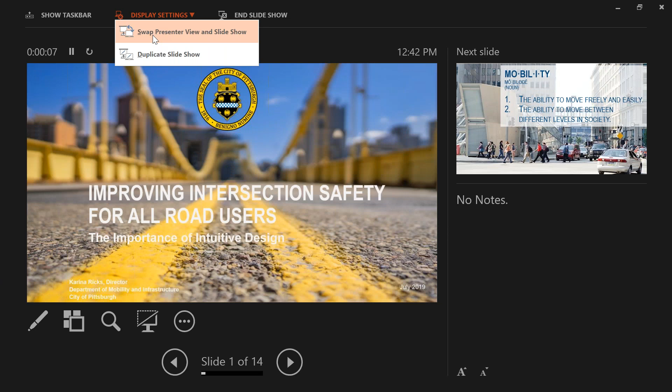Great. Well, thank you, Ben, Jeff, for allowing us to be a part of this presentation. What I'm going to talk just briefly about, I'll speak at a much higher level, I think, than the other presenters on this, but talking about the importance of intuitive design and what that means, how you sort of see things through that lens, and how we make planning and design decisions based on that ethos.

So maybe just a little bit before we get there, talking about the general philosophy and mission of the department that I'm fortunate enough to lead. The Department of Mobility and Infrastructure is a relatively new department in the city of Pittsburgh. It was, as many departments of transportation are, born, extracted out of a combination of the Department of Public Works and the Department of City Planning to bring this together.

But it is very inspiring to me that our name is the Department of Mobility and Infrastructure, because mobility has these two definitions associated with it. It, of course, has the definition of the ability to move freely and easily from place to place. But mobility also talks about social mobility and economic mobility.

And we know from research at Harvard University that the two are inextricably linked. That the travel time to destinations, and importantly, the travel time to employment opportunities, is the single most important factor in determining a household's ability to leave poverty and better themselves and future generations. So

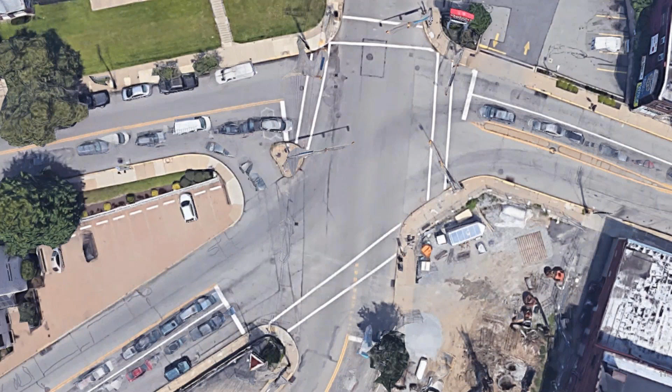Is it intuitive, the direction of travel they're supposed to take? This is an intersection we're working on, and we do have some improvements coming, but this is something where we really need to stand there together as a team, understanding all the rules, protocols, and design guidelines that exist, and recognizing just the human element of being out there on the street.

So again, this is really something qualitative, but it's a lens we use as we think about this. We're learning every day what it means and what limits we can really exercise if we're to achieve this goal. And again, this is a sub-goal under the overall imperative that we have, which is that no one dies or is seriously injured on our streets.

We need to understand that there are different cultural norms even within our own city, and what might be intuitive, comfortable, or safe in one neighborhood or for one age group may not be the right answer for another. So thinking about the diversity of our communities, we need to consider what practices we can teach our community, in addition to the design changes we can make at our intersections. And then really starting to understand preferences and putting those into the plan so we can pursue additional actions there.

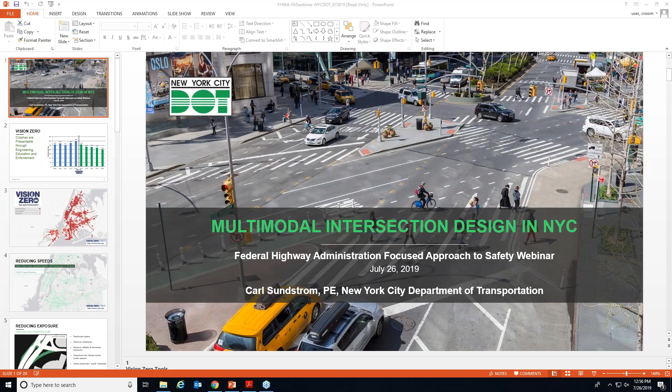Let me close this poll because I'm interested to show you all these results. It looks like the winner here, 53% of you mentioned the limited funding for making these improvements, and certainly I think that's often cited. If you're forced to pick one of these, that's a pretty common choice. Second place was 15% of you have no adopted plan to really formalize that prioritization and process, then 12% lack of familiarity with countermeasures, 11% lack of staff capacity. Many of you in the chat pod and in the other category said all of the above, so I didn't include that option, but that certainly is the case, and a lot of other ideas are coming in as well. Hopefully this can segue into our discussion later, but I thought that'd be interesting to ask you all that question and for our panelists to see.

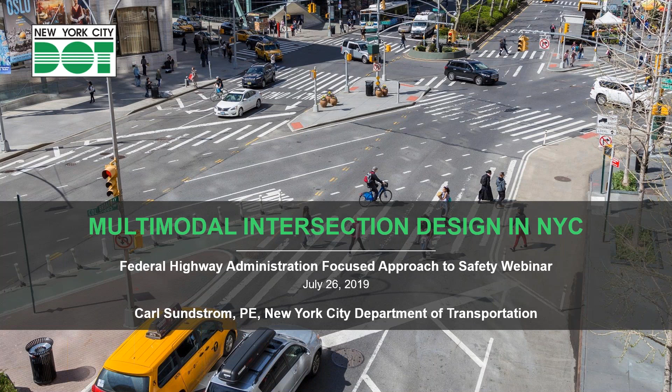So just to touch on our Vision Zero program, which guides a lot of our transportation planning and safety efforts in New York. It's a multi-agency policy that focuses on preventing crashes through comprehensive legislation, planning, enforcement, engineering, and education efforts. The idea is to really change public policy and mindsets through this Vision Zero program. It has brought us success in terms of reducing traffic fatalities, particularly pedestrian fatalities - we've seen a lot of success. They've been steadily falling, as you can see on the screen here, even though we've seen a pretty large growth in population, jobs, and tourists since 2014.

But of course, Vision Zero is about saving every single life. So we're going to continue to do what we know is working, but we're also going to keep expanding into new programs and policies and try to keep working at getting that number all the way down to zero.

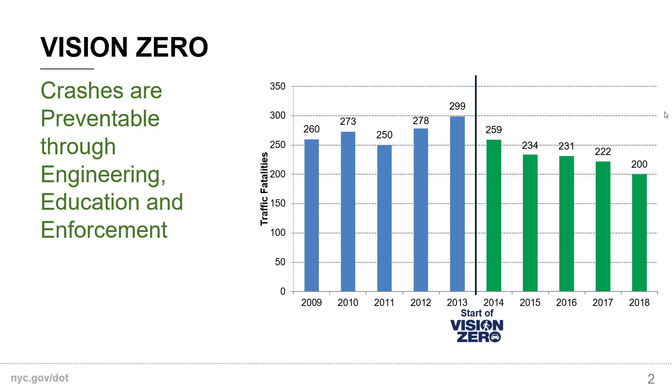This map here shows the Vision Zero priority geographies that guide many of our Vision Zero safety improvements. On the screen here, you can see the priority intersections, corridors, and areas, and all of those have been identified. Each of the 5 boroughs was ranked independently based on pedestrian killed and severely injured, or KSI, crashes. Those have all been ranked, and we picked the highest KSI locations for intersections, corridors, and areas, and that really helps us prioritize a lot of our improvements that we roll out citywide.

And then, though it's not shown, we also have some Vision Zero bike priority areas, which were based both on cyclist KSI crashes, but also bringing in a layer that focuses on dedicated bike facilities and identifying the locations with high ridership and high crashes that also have a lack of bike facilities, to really start focusing some of our efforts in those bike priority areas.

There's a link to this website here, vzv.nyc, the Vision Zero viewer, so you can go onto this website if you're curious to see more about our priority geographies. It also maps our crashes and maps a lot of where our treatments have been installed. I have several other links throughout this presentation, but if you download the slide deck that Dan put up there, you should be able to access a lot of the reports and stuff that I referenced.

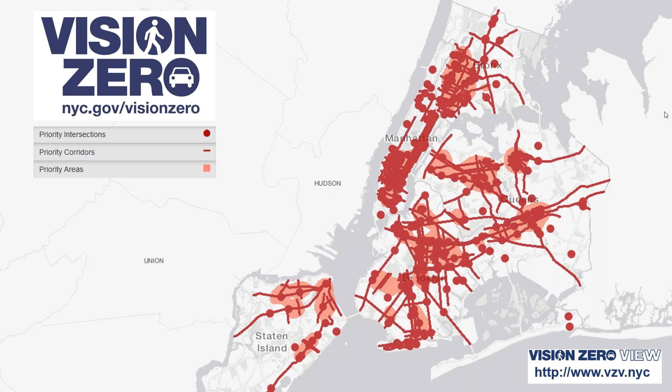One of our first Vision Zero efforts was to reduce the citywide speed limit from 30 miles an hour to 25 miles an hour. That occurred in late 2014. Since then, we've been working really hard to retime all of our major streets down to a 25 mile an hour progression. It takes time and a lot of work, but we think it has a pretty big effect in reducing speeding, especially the highest speeds. We've made a lot of progress on a lot of those streets, and we'll continue to get to the rest.

At the same time, we also have a pretty robust automated enforcement program where we have 150 red light running cameras that are active, and we're expanding our speed enforcement camera program to reach 750 school zones.

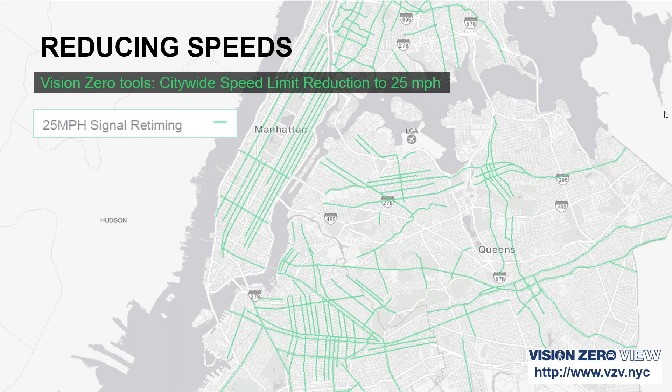Before I dig into the specific programs, I want to give an overview of the approach we take for many of our bicycle and pedestrian projects, especially at intersections. We start with a traditional approach where we look at the traffic analysis and do some field observations, seeing what's happening out there, what the capacity is on the street, and things that could be fixed, like what's happening in the curbside lane, for example if there's a lot of double parking or other issues we might be able to address.

We also take stock of the bike facilities and bus lanes and bus routes that may be out there. Then we really try to roll up our sleeves and simplify the intersections, remove some movements, make some signal timing adjustments. Sometimes that includes banning certain turns, really focusing on accommodating those desire lines, especially for pedestrians. That may mean adding median islands, closing slip lanes, or adding diagonal crosswalks. It's specific to each intersection. We also focus on making road users more visible by increasing pedestrian space, shortening crossings, and making sure we're designing safe facilities for everyone.

We also, as best we can, try to bring in community partners and other folks that can turn a lot of these reclaimed spaces into more social spaces for people.

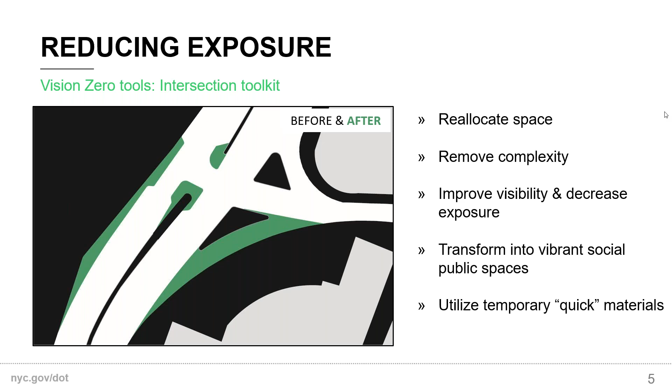A lot of this is done with our low-cost toolkit of things like epoxy gravel, using a lot of delineators, and concrete, using granite blocks and jersey barriers, and then in addition to that, doing some signal work. So a lot of this is pretty low cost. It avoids a lot of the challenges you run into around intersections, especially with drainage issues. It's a nice way to get something out there on the ground, and then you can look in the future at doing the more capital build out.

One of our major tools for reducing conflicts between pedestrians and turning drivers are the leading pedestrian intervals that we're rapidly installing citywide. So far we've installed over 3,700 LPIs, including over 700 just this year. The way LPIs work is they allow pedestrians to get at least a 7-second head start. It could be lower in some cities, but we start at 7 seconds and go up from there. That gives pedestrians a head start to move into the crosswalk before vehicles begin to move, and lets them establish the right of way. Oftentimes it gets them totally across the travel lane where drivers may be turning, and it's effective at reducing pedestrian vehicle conflicts.

In terms of our installation criteria, you can see we've installed a lot. We have two standard criteria. One is the expedited, where if you're in one of those Vision Zero priority areas, or if there's been a fatality, or if it's in a school zone, or a zone with a lot of senior pedestrians, or a location where a bus makes a turn, that will get an LPI right away. Then we also do a more standard analysis where if there have been 3 or more failure to yield crashes, or a high number of turning vehicles, we'll also put an LPI in. Anytime we retime our corridors, like retiming these corridors to 25 miles an hour, we look at the geography and go ahead and put LPIs in along the entire corridor.

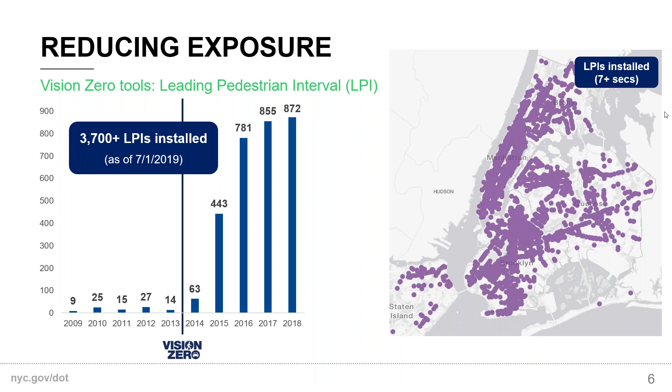One challenge that we've had is when you're holding through traffic back for 7 seconds, that really does impact traffic capacity, which can, depending on how saturated your street conditions are, have a really big impact and lead to gridlock, blocking the box further upstream from these intersections, that sort of thing.

So we really had to think a lot about this, and how do we balance the multimodal needs and ensure that we have safe crossings for pedestrians by providing these LPIs, but also not taking too big of a hit on our traffic congestion.

And so what we came up with was what we've been calling a split LPI, or a delayed turn, where essentially what we do is add a turn lane. So in this example here, it's an intersection, which is pretty typical for us, of two one-way streets.

We add a turn lane for, in this case, the left turning vehicles. They are held with a red arrow during the LPI phase, where the through traffic gets to go and the pedestrians get to go. Then after 7 seconds or so, we'll put up a flashing yellow arrow and allow the drivers to turn once the intersection is clear of pedestrians and they can safely turn. So this is a nice way to provide that LPI on some of these more congested corridors without really impacting that through volume.

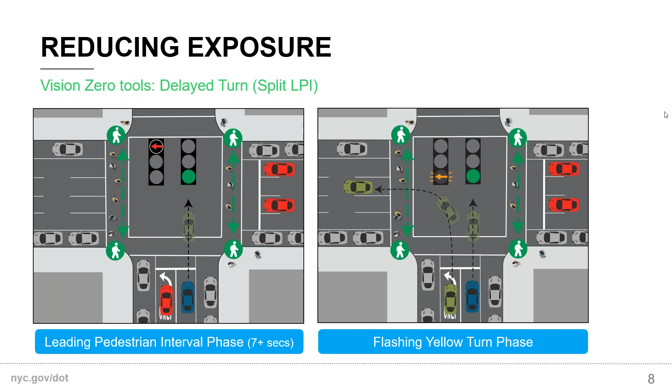And speaking of bikes, we're also just looking at how we can bring the benefits of this safe head start to bicycles as well. One of our council members proposed a change that allows bikes to use the LPI.

After some back and forth among our different agencies, we were asked to conduct a pilot test of allowing bikes to use the LPI first, just to see if there were any concerns.

One of the bigger concerns was whether this would impact pedestrian safety in terms of cyclists maybe not yielding to pedestrians who are crossing during the LPI. So what we did is an observational study where we looked at the behaviors of cyclists out there today at locations where there are LPIs.

We found that already today, almost virtually every cyclist is using the LPI. They're not waiting for the green ball to go. So this is kind of already existing behavior, and we didn't observe at any of the intersections any conflicts at all between pedestrians and cyclists. We also did a crash comparison.

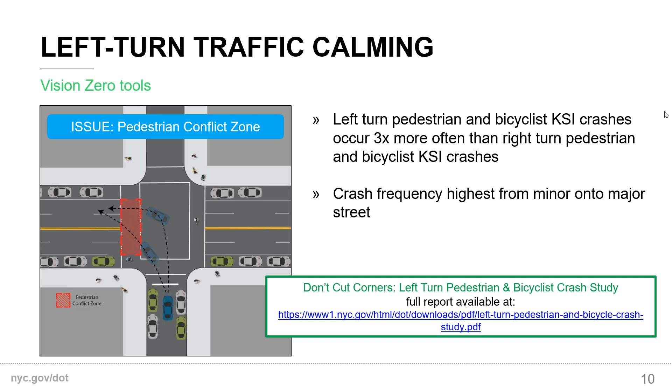Part of what we think is occurring with the left turns is that there's a large conflict zone, as you can see in the diagram here, where drivers are cutting that corner and coming at a faster approach speed, also leaving pedestrians more exposed for a longer crossing. I think that's a big part of it. And then the vehicle design itself, where the A pillar might be obscuring pedestrians, is another issue with left turns. If you want to read more, there's a link on the slide you can look into later to read the full report.

So what we did is we designed a left turn traffic calming toolkit. This shows an initial treatment, just the hardened center line, where we put vertical delineators on the center line itself to guide the driver around the corner and not allow them to cut the corner and cross that center line. You can see that cuts that pedestrian exposure distance in half right there.

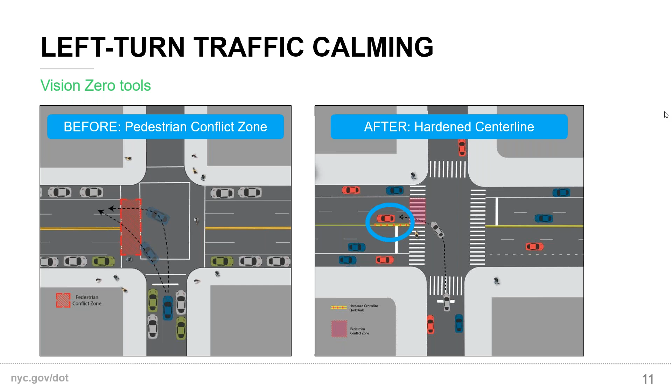This is something we tried out. It looks pretty good, so we started rolling out and evolving the program. Here's a photo of an additional treatment, a photo of the hardened center line. And on the lower left, you see a slow turn wedge.

This program can be done using a combination of these treatments, or they can be used individually. For example, we would use that slow turn wedge, but not a hardened center line, if you were turning onto a one-way street where we couldn't use a hardened center line. And the slow turn wedge itself, we've been experimenting with different materials, like using rubber speed bumps in there, or even raising it up with asphalt.

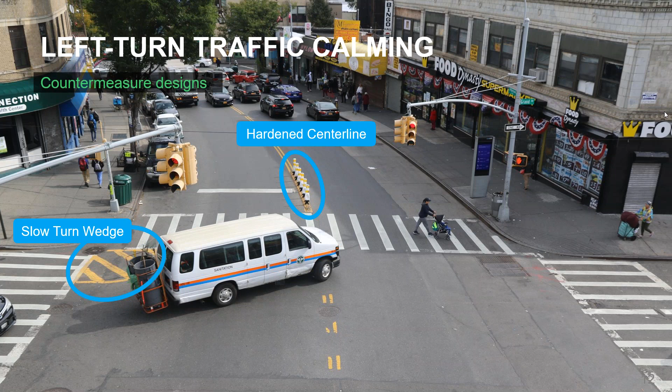So we've been evaluating this treatment, and we found that the median left turn speeds have decreased by over 20%. The maximum speeds have decreased by almost 20%. Vehicles crossing the double yellow line has basically been eliminated, which makes sense.

But there have been some durability issues. In the photo on the right, you can see a rubber speed bump, and behind that are those delineators. Initially, we did not have that speed bump, and what we found is that a lot of drivers were hitting those delineators. So we went out and purchased these speed bumps and put them in, and it protects the front of those delineators. That's really saved us a lot in terms of drivers knocking over the posts, and it's also decreased the speeds even more.

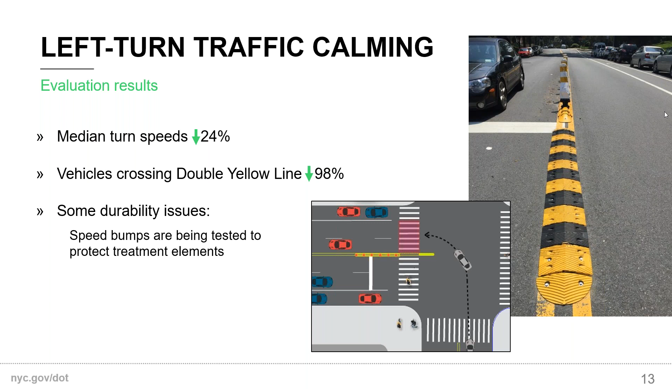The one thing to mention is that we're still keeping an eye on how these weather and how they go through the winter in terms of snowplows hitting them, and how frequently they need to be replaced, and also paying attention to where we place them in terms of where a bike facility may be, making sure they're out of the way and not an unexpected bump in the middle of the road for cyclists.

In terms of how we're implementing the left turn traffic calming program, we're trying to do at least 100 locations each year. We're really focusing on areas that had 5 left turn pedestrian and bike injuries or more, which there are 525 intersections in New York that have that on average. So there's a lot of work to be done, but we're rolling these out pretty quickly. Again, there's a link there for the left turn traffic calming program website if you want to read more about it.

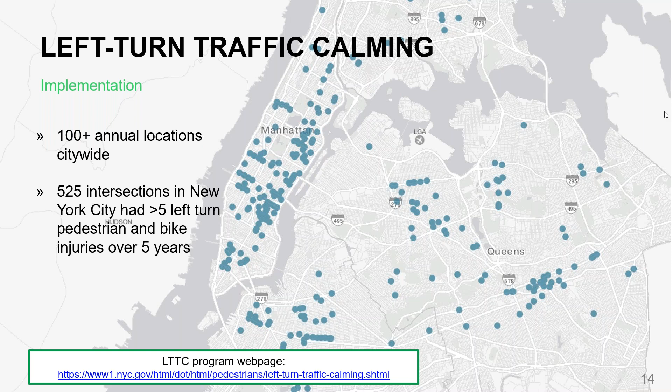And then finally, I want to talk about intersection design for protected bike lanes, because that's been a pretty hot topic for us recently for a number of reasons.

One is that we just have a lot of miles of protected bike lanes now, and they've been in long enough that we now have enough data to really conduct an evaluation on these different intersection treatments.

So we've been installing protected bike lanes in New York since 2007, and they've really increased the comfort of cycling and attracted a lot of new riders. And they've also increased the safety for cycling along many of these key corridors that we've installed the protected bike lanes on.

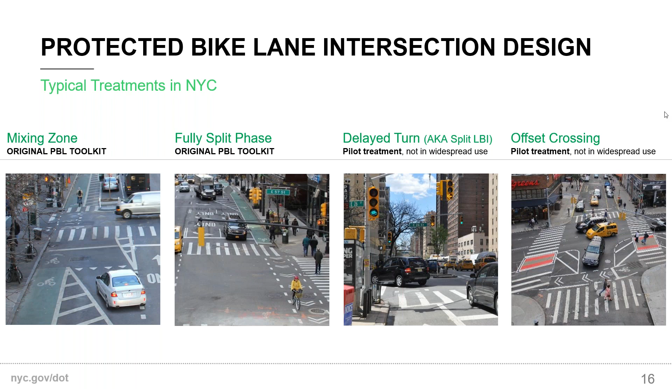And what we did in the study is we looked at it in a few different ways. So safety was the first thing we looked at, but we could only look at crashes for the mixing zone and the fully split phase intersections, because those are the two where we have some crash history.

But we also hung cameras at many of the intersections and looked at conflicts that were occurring and just how people were actually using these designs.

So this kind of gets back to Karina's point about like what's intuitive and how people want to use it or how people expect to use it.

And then we also had our street ambassadors go out and do cyclist intercept surveys, just after they had gone through a lot of these different intersection types, just to get a better understanding for how people perceived the safety of these intersection treatments and if they really understood how they're supposed to operate.

And what we found is that the fully split phase intersections had the lowest crash rate, compared to the mixing zone. They were safer at the wider crossings, but not necessarily at the narrower crossings. So where we had just a shorter crossing, the mixing zone was just as safe as the fully split phase.

And what we think is happening there is that when you introduce a fully split phase, you're introducing a lot more delay for cyclists because you're taking away their green time.

So in the mixing zone, you have the full green time that the cars have in the through movement. But when you split it out between bikes and the turning movement, you're increasing that delay.

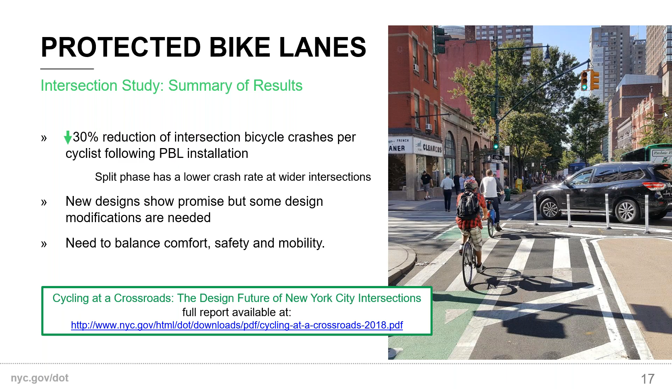And the last thing I'll mention is that really nobody understood who was supposed to yield at any of these intersection treatments. So that's another issue that we need to solve in terms of what makes things intuitive and what the expectations are for the different road users. And all this is summarized in the report, and there's a table in terms of the application considerations where we want to use these different ones based on our safety and comfort findings.

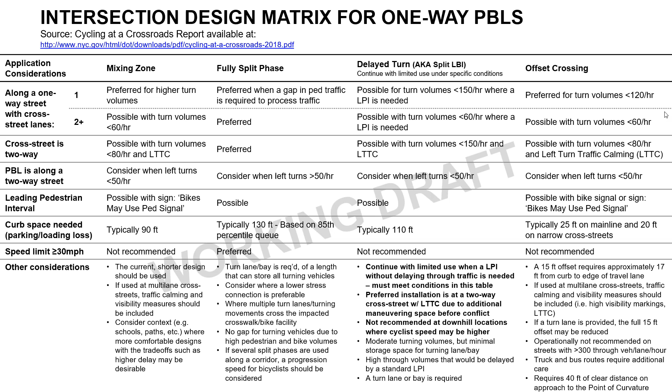So this is a lot to dig into, and I'm running out of time, but there's a link there again that you can go into at your leisure.

And then I just want to point out a few of the things with the offset crossing. I mentioned that this is kind of our take on the protected intersection, but the design challenge here is that we have a really constrained geometry to work with. We're not cutting into our curbs at all, into our sidewalk space, and our cross streets in a lot of these cases are 30 feet wide. They're pretty narrow.

So this is kind of the evolved design that moves past what we did with our pilot study, where we were concerned about the turning speeds being a little bit high. So we've designed this truck apron using a speed bump, which you see there in the black and white speed bump there. The other nice thing about the offset crossing is that it provides an additional pedestrian island on the upstream side of the crossing, which doesn't exist in a mixing zone. You can see that the conflict point is reduced to a single area, right where that lead cyclist is riding through.

And we now have these where we have intersecting protected bike lane facilities. So there's space there to run a curbside protected bike lane on an intersecting street through kind of that turn wedge and provide kind of a protected intersection type of geometry. So we're still studying these. We're still modifying the design. We're still trying to figure out how they work operationally in terms of traffic flow as well.

But we're pretty excited about them, and we've been retrofitting a lot of our mixing zones after resurfacing to include this treatment instead, and then a lot of our new projects are getting them. So with that, I think I'm out of time, but excited to talk more during the Q&A or in the future.

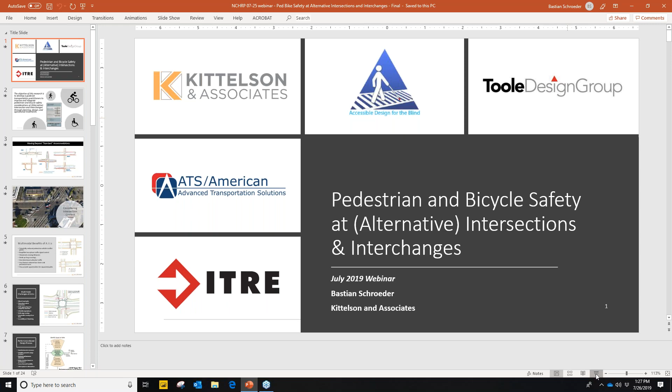Okay, thank you. So in the last presentation today, I want to talk about an assessment method that came out of an NCHRP project, 7-25, that actually is about to wrap up, pedestrian bicycle safety at alternative intersections and interchanges. But you'll see we put alternative into parentheses now because really what we came to find is that the assessment method we came up with really works for many intersections, and seeing the prior presentations by Karina and Carl really resonated, that really some of the concepts that we're finding to be challenging from a safety as well as comfort perspective for pedestrians and bicycles at alternative designs really also show up in more conventional intersections.

But our initial objective is to develop a guidebook for practitioners to improve and integrate pedestrian and bicycle safety into what we now call AIIs, alternative intersections and interchanges. And we expect this guidebook to be published in early 2020. At this point, we have presented an initial draft of our guidebook to our project panel. We're getting ready to submit a revised guidebook very shortly, and then we're hoping to see that through to publication early next year.

The key to all this is to move beyond what have now become kind of the standard accommodations, and that's the word that has almost become a little bit of an undesirable word when it comes to pedestrian and bicycle safety, so that the intersections are designed primarily for vehicular traffic, and then we check the box. Let's get pedestrians and bicycles through there. Let's accommodate them somehow into the design. And really our focus is to move from accommodation to integration.

So as we're laying out the new design, really integrating the best and most viable and most appropriate design early on, which includes decisions of facility selection. And that might be one of those protected bike lanes that Carl mentioned. Really, we need to know that before alternative selection or during alternative selection, so that the adequate right-of-way decisions can be made.

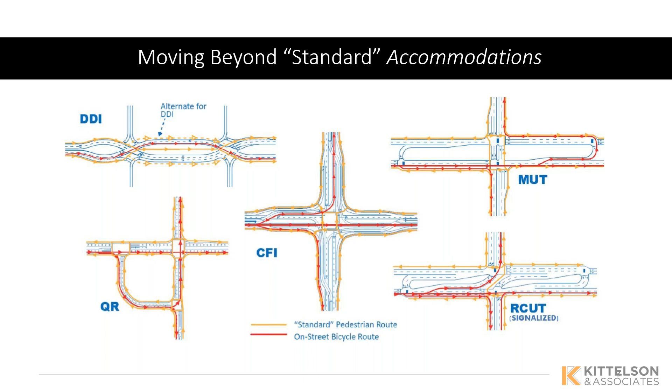Here's the 5 most common alternative designs that hopefully many of you are familiar with. And what is shown here is what has typically been the way that pedestrians and bicycles move through these intersections and interchanges. But we're really taking a fresh look at that and seeing, are there maybe other options?

An important thing to remember is really intersection context. And what I mean by that is to consider where these alternative designs are typically being used. And we saw a lot of examples that Carl showed, for example, of really narrow one-way streets in New York City, where some of the pedestrian bicycle safety treatments are maybe a little more viable when it comes to slower speed facilities and lower vehicular volumes maybe.

But we see a lot of the alternative designs really replacing intersections like this. So very, very wide cross sections. There's a skewed approach. We have dual left turns in the east-west direction, and then we have protected permissive left turns in the north-south direction. And we can probably have a separate conversation of which of those is actually worse for pedestrians and bicycles.

So a lot of times these alternative designs are being put in for either a vehicular capacity motivation, so reducing the number of signal phases, redirecting left turns or through movements, replacing complex 8-phase signals with very efficient 2-phase signals to increase the capacity. Or they are put in from a vehicular safety perspective, where through the redirection of movement, through the reduction of conflict points, many of these alternative designs have provided tremendous safety benefits, which certainly ties into Vision Zero initiatives like we heard from New York City.

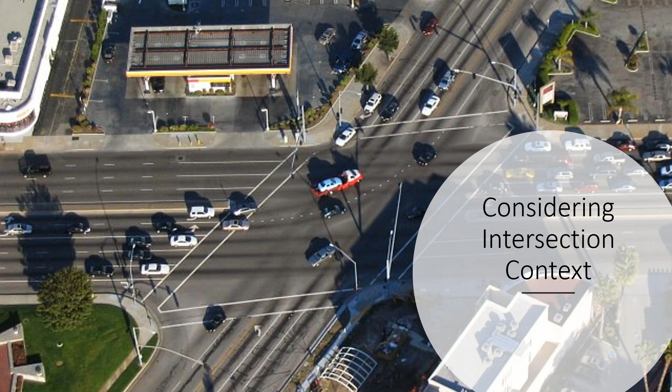But then there are some challenges for the multimodal users that we want to get a hold of and get in front of. But I just want to emphasize that we've gotten feedback, well, why don't we build a single lane roundabout? And really these are intersections where the vehicular volumes are just too high for that type of a treatment to be appropriate.

Shorter crossings: a lot of these intersection types use wide medians, so we can implement 2-stage crossings, breaking up those long distances, and then resulting in crossings that look at one direction of vehicular traffic at a time. So similar to the one-way streets or similar to a roundabout where we have an entry and then the exit, it becomes easier decision-making for pedestrians. And potentially these designs also have reduced turn lanes and may provide opportunities for separated paths as additional right-of-way is being freed up, for example, with a diverging diamond interchange.

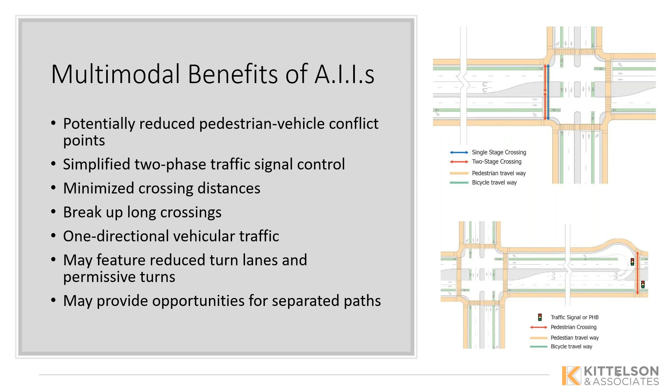But there are some real challenges. The designs are unusual, unconventional, and so sometimes the travel paths for both pedestrians and cyclists are altered.

Sometimes traffic is coming from unexpected directions, which results from the redirection of left turns at a DDI or a DLT. The signal phasing may be unusual, and you may end up with crossings that, while shorter and having refuge, are still multi-stage crossings, which can result in long delay times for pedestrians. To cross at a DLT, for example, it may require two, three, or even four signal cycles—very long to safely get across the street.

But this also creates real challenges from an accessibility and wayfinding perspective. Just imagine how a blind or visually impaired traveler would begin to understand how to get across this type of intersection and understand where traffic is coming from—when is it coming from the right, when is it coming from the left?

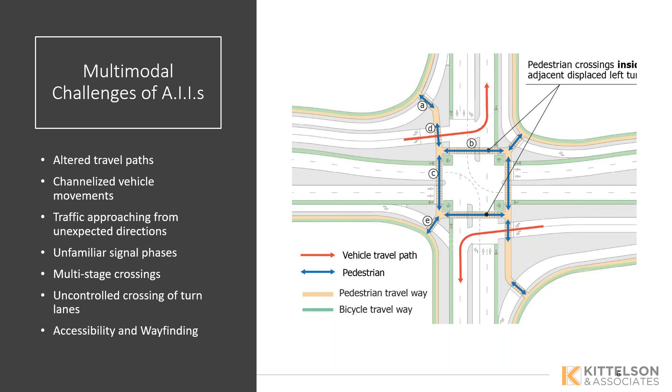Our guidebook really focuses on a performance-based design process, which is very similar to what many of you may be familiar with in the roundabout guide, where we're looking at design checks, fastest path checks, path alignment, design vehicle checks, as well as some multimodal checks. A lot of this is described in NCHRP Report 785.

Understand that the next AASHTO Green Book is really going to have much more of an emphasis on performance-based design. The idea is that it is performance-based as opposed to prescriptive, and that's been really key for us. It is not the intersection itself that is either good or bad, but the nuances within the intersection—it's the turn radius, the approach speed of vehicles, the sight distances. So we're really emphasizing these performance checks in the evaluation.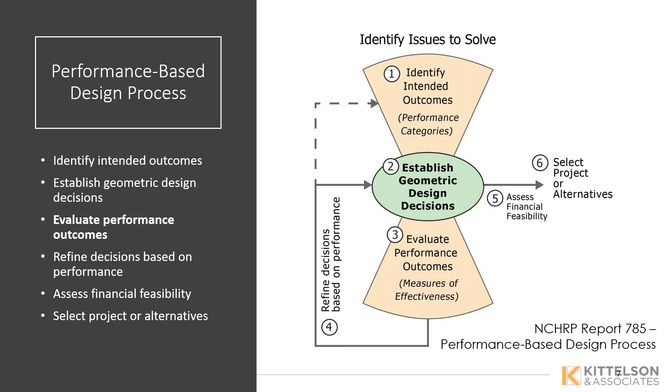A lot of emphasis in our guidebook is really integrating this evaluation in an ICE process, or intersection control evaluation, that many states have adopted at this point, where intersections are being evaluated not only from a traditional vehicular level of service perspective, but also looking at vehicular safety, at costs, at life cycle costs, and also evaluating pedestrians and cyclists—multimodal users in the design.

What's key for us is that in ICE Stage 1, the early alternatives evaluation, we need to be able to make decisions on the adequate facility type at that early stage. If we know early on that because of the level of vehicular volume and speed—say 40,000 ADT and 50 mile per hour design speed—we need to select the adequate facility type, especially for bicyclists, early on. This is consistent with the Federal Highway Bikeway Selection Guide that came out earlier this year, which is a great document. If you haven't had a chance to look at it, I encourage you to take a look online.

And then in ICE Stage 2, when we're refining design alternatives and evaluating between maybe a handful of intersections, that's really when we have a more detailed assessment process that I'll spend a little extra time talking about in this presentation. But again, the emphasis in ICE Stage 1 really requires the facility selection for multimodal users at that early stage.

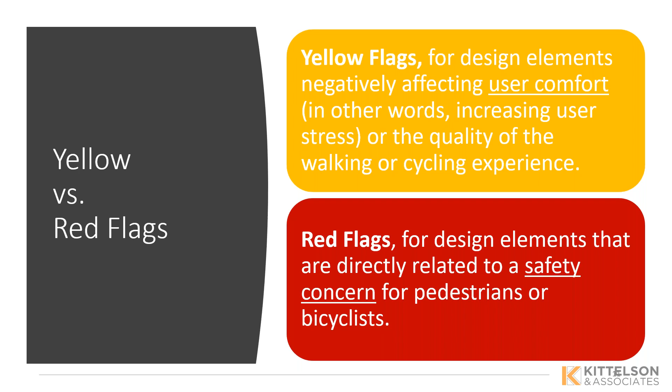These flags are evaluated for cyclists. They're evaluated for all the turning movements or origin destinations, so all the through, right turns, and left turns at the intersection are evaluated. For pedestrians, we're evaluating the 4 quadrant-to-quadrant crossings. You can envision a design where you pick one quadrant or approach, go through each movement and each of the flags, and we'll have handouts and checklists to help you go through that assessment. You just tally up what these various flags are. It may take a little time the first time through, but as you become used to it, it does go a little quicker.

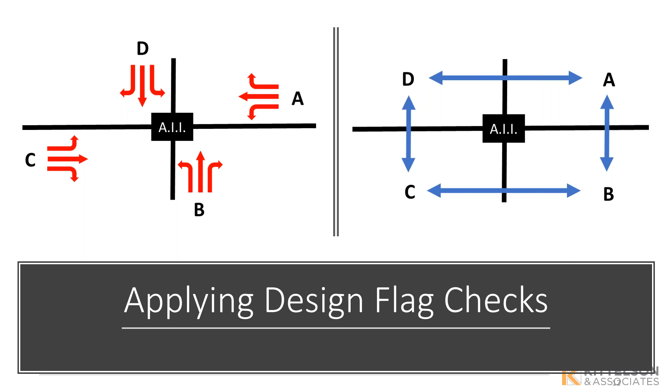We have applied this to a few actual case studies at this point, and found that you can be quite efficient, similar to the first time you do a road safety audit. Everything is different, new, unusual, but as you become more comfortable with it, things tend to go more quickly. So I want to share just a few of the design flag examples.

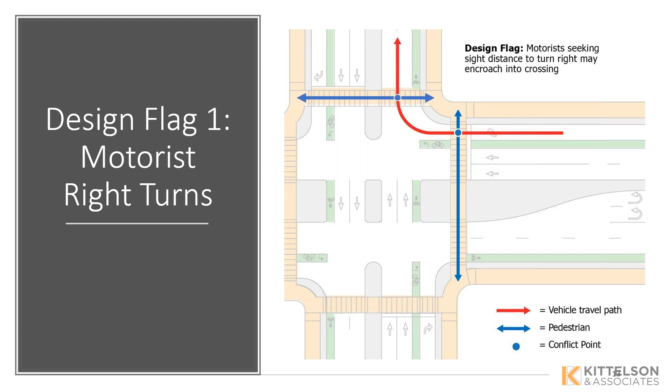The first one fits right in with the earlier presenters, which is motorist right turns. These can either include right turn on red type situations or right turn on green situations, where pedestrians crossing from either of the blue movements are in conflict with the vehicular right turn. Obviously, treatments such as the ones Carl mentioned, the leading pedestrian interval, are directly designed to counteract some of these conflicts.

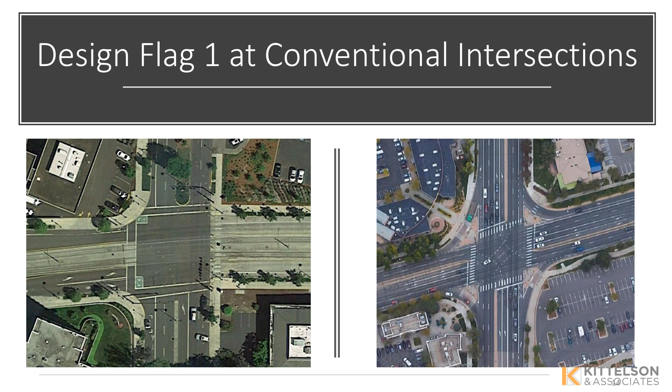On the right-hand side, this is an intersection in Boulder, Colorado, where 3 of these channelized right turns have a raised crosswalk, a speed table that slows down vehicular movement. The 4th one does not. The right turns are evaluated as a function of the conflicting vehicular volume as well as the vehicular speed, and there are ways to predict both of those.

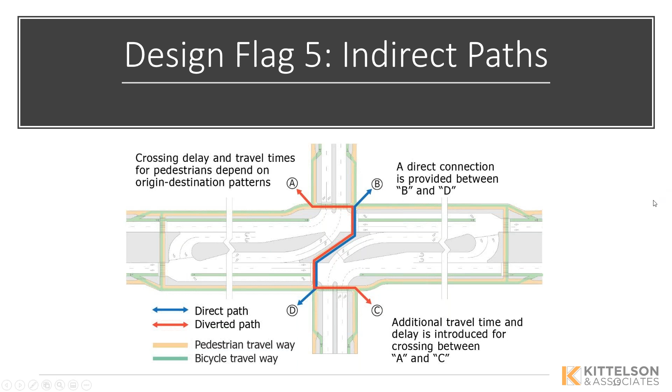Another example is indirect path. I'm skipping over a few flags here. Number 5 is indirect paths, and here's an example of an R-cut, or super street, synchronized street—there are different words for this intersection type. The official Federal Highway term is R-cut, where depending on the origin and destination, there may be some out-of-direction travel. A pedestrian traveling along the blue line from quadrant B to D has a direct path. A pedestrian traveling from quadrant A to C has a more indirect path, and therefore some out-of-direction travel. That's being evaluated, and depending on how far out of direction that is, we assign a certain rating to it.

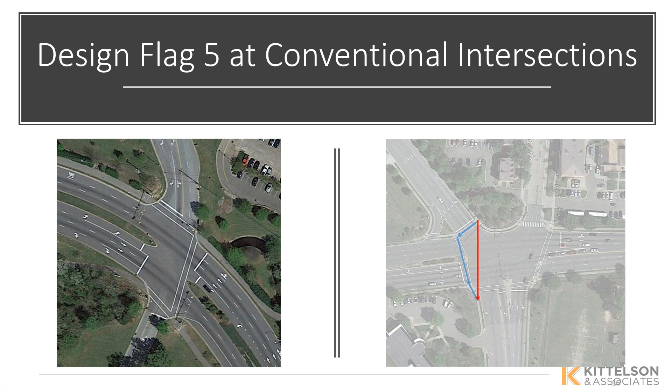On the right, an intersection where, again, there is not necessarily a direct opportunity. The red crossing is not there, and the blue is an out of direction travel. The evaluation of each of these design flags applies equally to alternative or conventional designs, with the motivation that we can actually begin to compare those two intersection configurations.

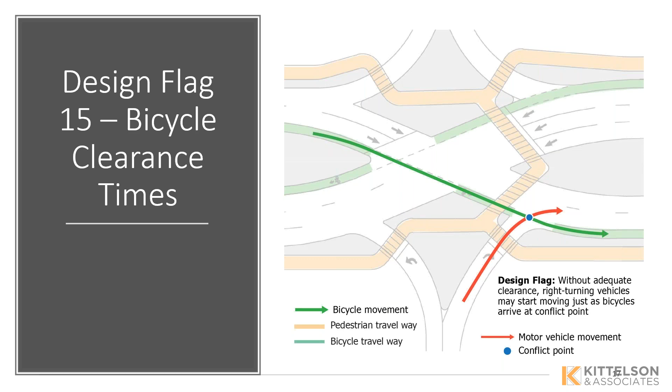But here's examples of just a standard intersection. There's a bike lane going from the top left to the bottom right. The clearance time to get across these 8 or more lanes, the corresponding all-red time for vehicles, may be on the order of 1 to 2 seconds.

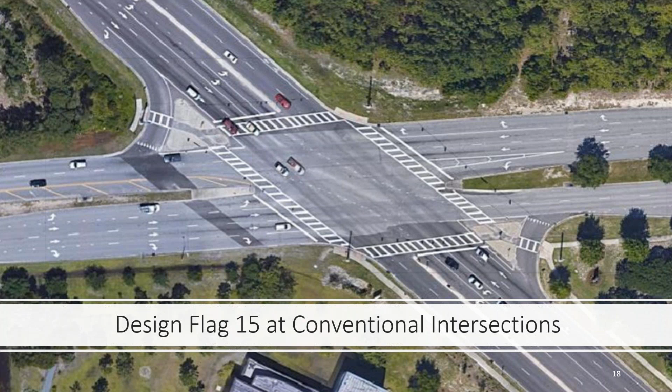Cyclists need at least 5 or 6 seconds, maybe more, depending on level of expertise, grades, and all these considerations. So there might be some clearance time concerns there, where a cyclist is caught in the middle of an intersection when the conflicting vehicular phase gets a green indication.

And then finally, the concern here of a lane change across motor vehicle lanes. Here's an example: the intended left turn maneuver for cyclists, shown as the green line, and the left turn movement for vehicles in red.

Cyclists wanting to complete that maneuver without the 2-stage left turn box, which is actually something we've added to this intersection configuration—the expectation for cyclists to do 2 lane changes or more across heavy vehicular volume that may be traveling at 40, 50 miles an hour is a real safety concern.

So expecting not only the out-of-direction travel that is evident here—so there are 2 flags in play for this particular example—but then the safety concern of the lane change maneuver, it can be a concern at either the median U-turns or the R-cuts.

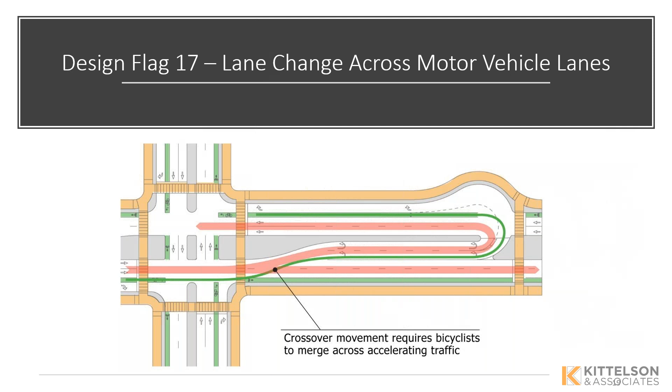But here's an example of a neighborhood street where that is also the case. At the bottom here we see an on-street bike lane and then a downstream left turn pocket. In order for cyclists to complete that left turning maneuver, they also have to lane change across motor vehicle traffic. You might argue that in this particular case, that is a more comfortable and safer maneuver than in the prior example, and that's exactly the case.

So in evaluating whether this type of situation is a yellow flag or a red flag, we're really looking at the conflicting vehicle speed, the conflicting vehicle volume, and the number of lanes to decide whether this is something reasonable to expect from cyclists, or whether it's truly an unsafe situation.

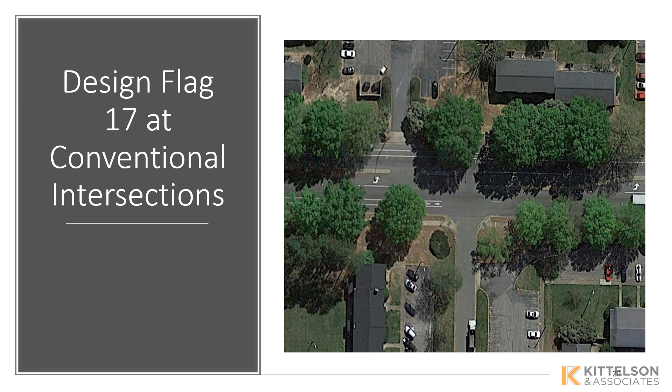Overall, we have 20 of these flags. I only showed you an example of 4, but once the guidebook comes out, you can see all of them. Again, they apply equally to either the alternative designs or the conventional designs, and it will allow you to do a comparison.

Here's an example of, let's say, 4 alternatives, A through D, where you go through the overall assessment for pedestrians and the overall assessment for bicycles, and you can tally up the percentage of movements classified with either a red flag or a yellow flag. In this particular case, alternative C stands out as being the safest for pedestrians and bicycles. But the guidebook doesn't stop there.

In the interest of time, I can't go into a lot of detail, but really the next step after doing this assessment is to then go to treatments. The assessment is actually chapter 4 of a total of 9 chapters, and really the remainder of the chapters are geared at evaluating treatments and countermeasures to overcome some of these design flags, which can either be spot treatments, such as the raised crosswalk in a channelized lane, or treatments that entirely reevaluate and re-envision what these intersections look like.

For example, with the R-cut configuration, these are maybe different from the standard, where we do have bike lanes, but we also have multi-use paths. We have off-ramps for bicycles to use the sidewalk network, similar to a roundabout. We have U-turn crossing opportunities to provide more ability for pedestrians to get across the street.

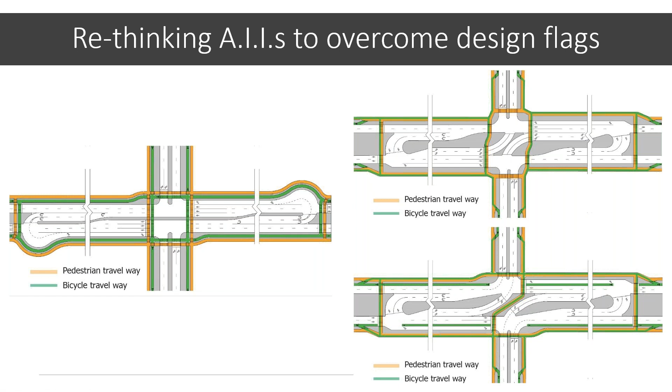R-cuts, where the direct left turns for vehicles are taken out, allow a more direct crossing for pedestrians and cyclists across the street. Or even with the U-turn, introducing a third signal phase, still very efficient and still very safe, but providing a more direct experience for cyclists and pedestrians to get across the street. So these are just some examples of really re-envisioning what these alternative designs can look like based on the assessment process.

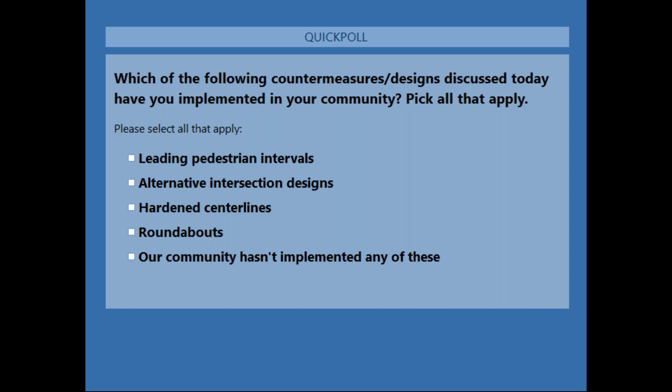Just briefly, so Sebastian hit on the main concern where blind pedestrians cue off of the adjacent traffic, which when we have a 7-second LPI, they're not able to enter the roadway during that 7-second LPI, which could lead to some confusion from drivers who are unsure if they're planning on crossing or just waiting on the corner.

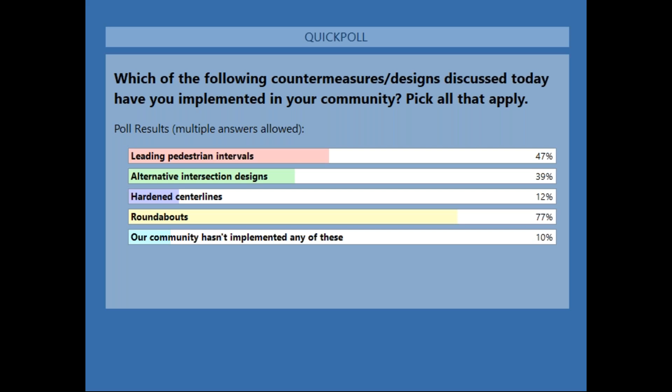The poll question is now completed and I'm showing the results. 77% of you have experience installing roundabouts, almost half, 47%, with LPIs, 39% are using alternative intersection designs, and 12% hardened center lines. That's maybe more than I would have expected. Some of you haven't used any of these, but probably other treatments you have used. I think that's interesting to see that range.

My next question is related to political will, which was brought up as an impediment a lot of folks face in making needed changes to their intersections. I wanted to ask Karina about this question: how important is it not only for staff in the department to know about countermeasures and how to design, but to also have that policy-level statement saying we are putting our emphasis on this particular problem, to have support from the top down for these changes? From your experience in Pittsburgh, is that how you're approaching this?

I think the folks on the call know that it is essential. Part of our jobs now as transportation professionals is to be good storytellers, to explain things clearly, and that's part of the reason our goals are laid out in layperson terms. We want to reduce VMTs, improve NOx emissions, and do other things that regular people don't talk about. Being able to explain it in ways the average person can understand in a short period of time is absolutely essential to gaining political support and the will to follow through, understanding what the trade-offs are. We always say all the easy stuff has been done, so everything from here on out involves hard trade-offs, and we need to explain what needs to be weighed in that.